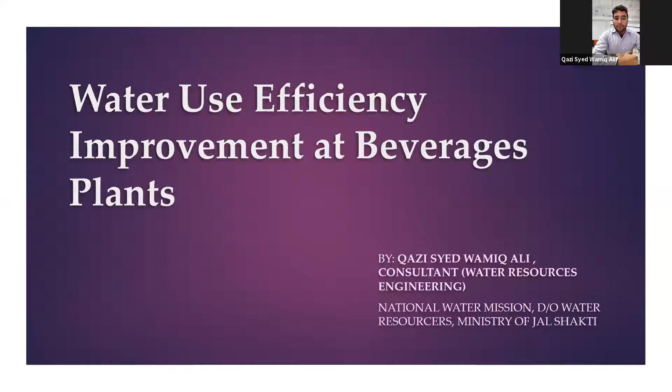This project is for about 1 year. The basic objective of this study is to reduce the water usage ratio, and also monitor and assess the UF-RO filtration process that has been used in tertiary treatment in the beverage sector after the ETP in different beverage plants, to understand the actual efficiency of the ultrafiltration reverse osmosis process. As a pilot project, I have taken the first plant, the Ameenpur plant in Hyderabad.

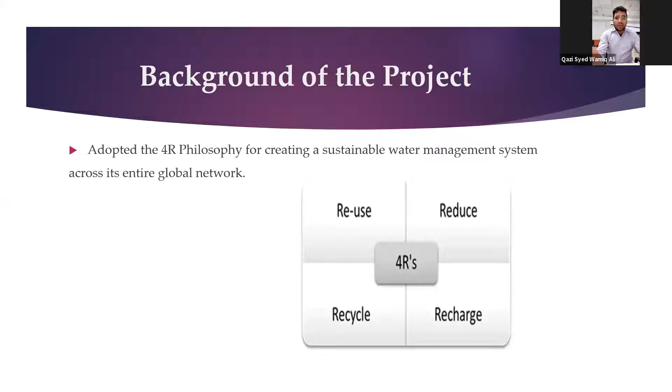This is basically the normal water treatment process for this beverage industry, where the major intake is from the Manjira River, from where they collect the water. This is the typical water treatment process, with tube settlers and pressurized sand filters, and activated carbon used for removing pesticide or odor. Then it goes to different units like a dealkalizer, degasser tower, and activated carbon filter, where if the chlorine is free, it can be used further for UV.

This water is used for two processes, taking the groundwater or the pond water for treatment. It also goes to the units, and also for the bottling process, because the beverage industry has its own bottling process unit. So when it goes for filling the bottles, this final product has been used.

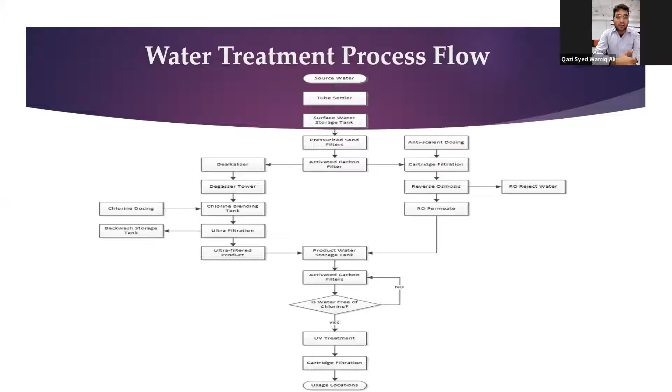So this is the normal water effluent treatment plant process of that particular beverage industry, where they have normally collection sump, oil grease separation, and equalization tank.

What we did when we started this study, we did it stepwise. First we started monitoring the WTP, then we inspected the ETP, because there were two issues coming up: high hardness at the end of the tertiary treatment in UFRO, and also floc carryover. There is an issue of floc carryover, hardness, and also failure of the UFRO, that is not giving us the opportunity to reuse excess amount of water.

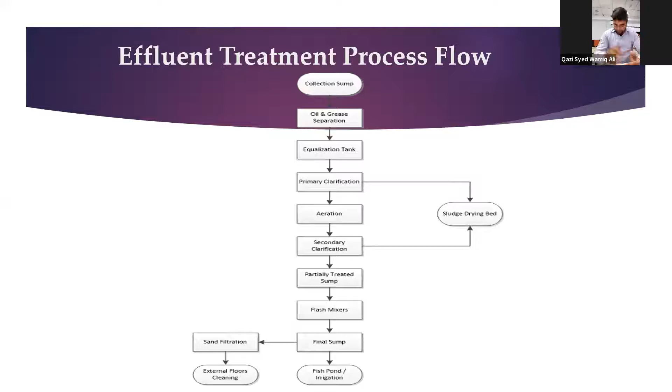Basically, our aim is to reduce water usage ratio. What is water usage ratio? It is the ratio of the water intake by the industry and the volume of beverage manufactured. So as much as the water usage ratio is low for any industry, it means they're intaking less raw water. For example, if 1.6 is the water use ratio, it means 1.6 liters of water has been used for producing 1 liter of beverage. So as much as the WUR is low, it will be beneficial to us.

So in that project, our aim is water use ratio reduction, and we got the water use ratio reduction from 1.42 to 1.36. Though it's not a very huge gap, it gives us savings of water in KLDs, in thousands.

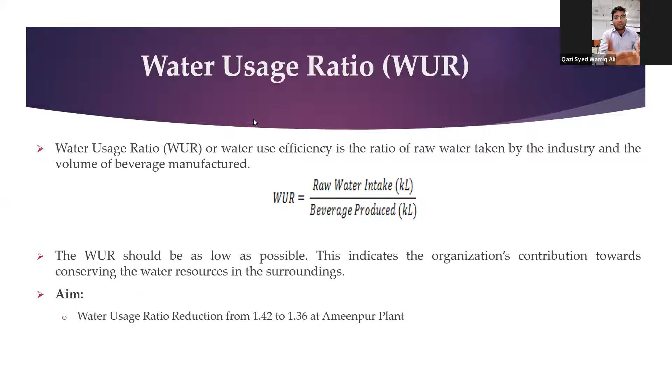Before doing the inspection, we recommended that as per CPCB norms, high hardness water from that particular industry should not be sent to the CETP. So the CPCB has recommended us to go for the ZLD phase.

For the ZLD phase, we recommended the scheme that you can see on the screen: a second stage UFRO, using UFRO, UV, ozonator, and CIP.

CIP is the cleaning process, where mostly they were using raw water. We recommended that instead of raw water, you can go for treated water. That saves around 30,000 rupees per day for that particular consumption.

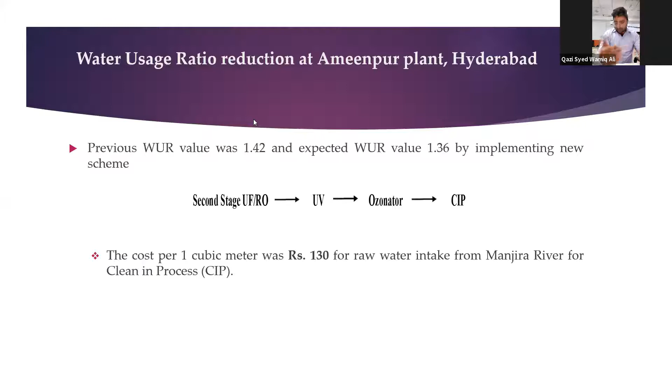So we followed a basic methodology. First, we did the benefit flow analysis to rectify what issues were coming up in the ETP, and if we install a new UFRO. We did the water balance and TDS balancing. Also, we did the proposed water balance to understand whether additional water has been available or required for making it available to the new UFRO system, the second stage RO treatment system.

Instead of using RGB, we can go for a PET line. That gives us a reduction of TDS of around 15% and makes the UFRO run up to 80% efficiency. Next slide.

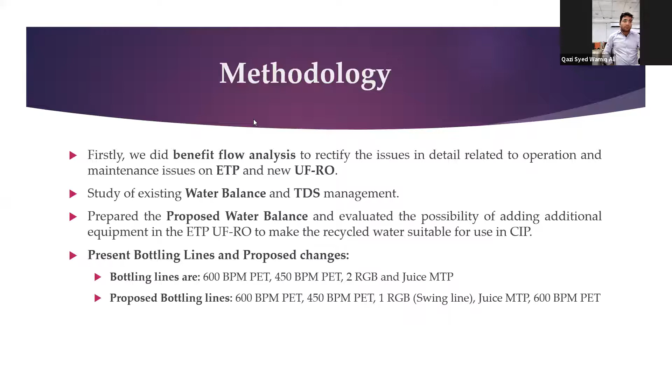Then we moved further for analysis of the water treatment process, where we found that since operation, the dealkalizer unit has issues with effluent TDS, because the TDS generated is very high.

So we suggested using the chemical coagulation unit at maximum output. For that, to bring the maximum output, we used a standby 3 micron filter and UV to make the coagulation system run at maximum output, supplying water coming from the PET line directly, to reduce the burden on the dealkalizer unit.

And also reduce the chemical consumption. Next, we also found there is a possibility of carryover of floc into the sand and carbon filters, damaging the filters.

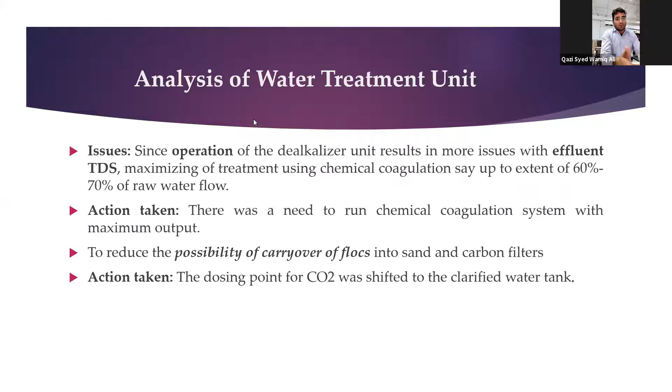So we have suggested that, and we have implemented. We did the repair work for the air diffusers for the equalization tank. We have installed the new diffuser grid system in order to maintain the DO level of around 2 mg per liter or more. Second, we also seen that the aeration tank, also there is an issue.

There is black water due to dead bacteria present in bulk, and spent carbon is also coming up. We also found that in the aeration tank also, improper and inadequate air distribution was there.

So we have recommended new air blowers, and we have placed new air diffusers with capacity of around 1,000 meter cube aerated water that can be supplied, and 50 more air diffusers have been used with oxygen usage of around 1.5 kg of BOD, and that has been maintained. The DO of around 4 to 5 ppm. So this intervention has been done in the ETP.

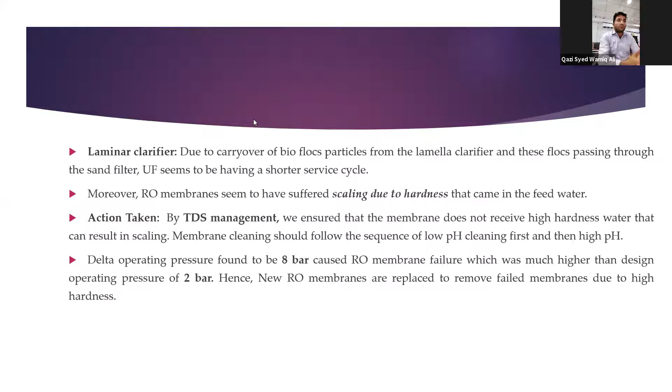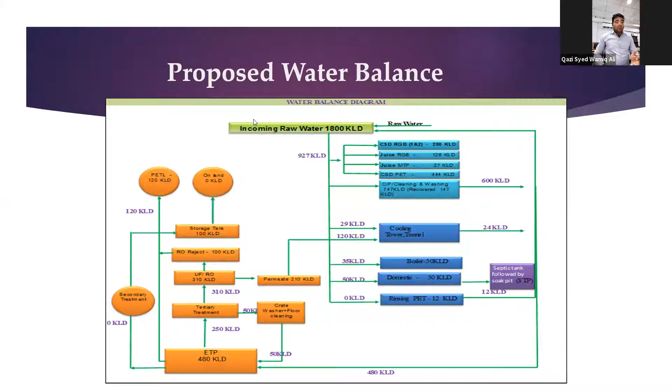But we found that in the new water balancing, around 120 KLD water should go to the CETP, that is in Hyderabad. Next slide.

So we also did the TDS balancing, and we found certain places where the TDS contribution - this is the worst case scenario TDS balancing we did, where we found softener regeneration is contributing around 12,000, dealkaliser regeneration is around 8,000, and UFRO rejects around 5,000.

So what we did - after the TDS balancing, all these points, for example softener regeneration, bottle washer, and DC regeneration - we have segregated these lines. Next slide.

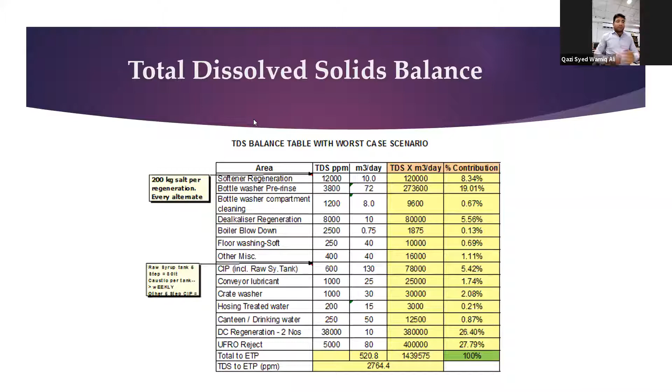So we did the segregation so that all the hardness will go directly to CETP instead of going into the ETP, until and unless the rectification has been done.

So we have also segregated the high and low TDS lines, and added additional tanks near the decausticiser and dealkaliser unit to achieve the segregation, and to stop the high hardness water from entering the ETP until rectification has been done in UFRO, and the second stage UFRO has been installed. So this has prevented the UFRO membrane failure and has made the UFRO run up to 70 to 80% efficiency.

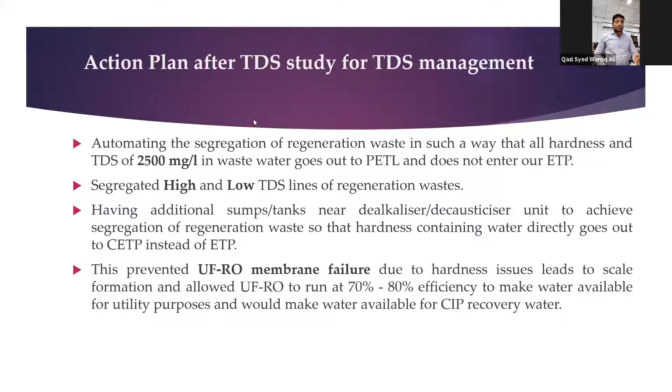We also did a small study on water use reduction opportunities at the Ameenpur plant. Wherever there was a raw water intake, we used UFRO treated water instead, for example in conveyor lubrication. The lines marked in red were pending at that time and are still under construction, so those lines still have to be provided. There are a few places where we've been able to use treated UFRO water instead of raw water.

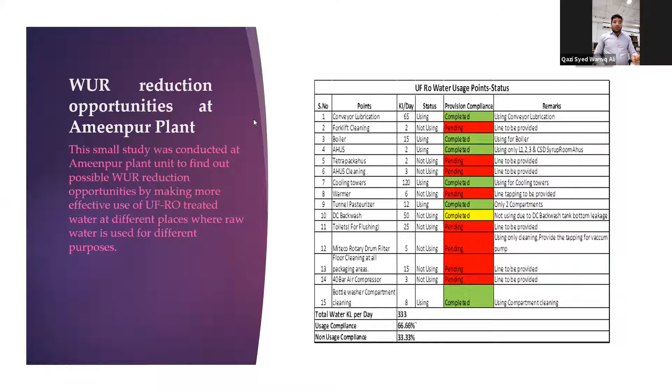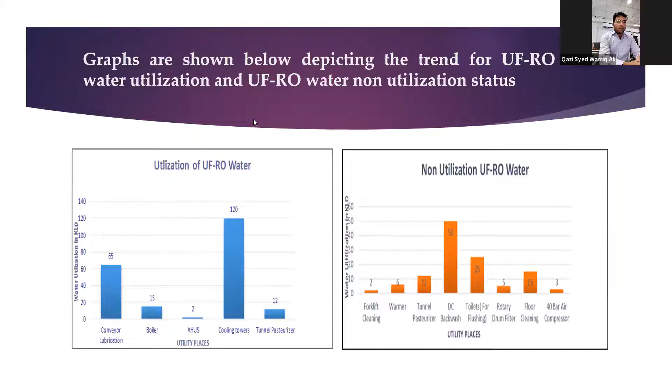When it comes to compliance, around 66.66% UFRO treated water compliance is going on, with non-usage compliance around 33%. This means the amount of water recovered in a day is around 333 KLD. We found that for the lines still using raw water instead of treated water, if they reuse UFRO water, it would give us a better water use ratio and could increase efficiency by around 60 to 90%.

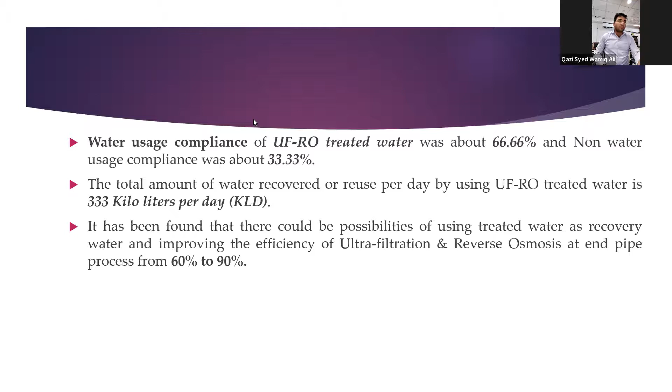This is the plan we recommended for a new ETP UFRO unit. Before that, we also saw there is an additional requirement because, as per State Pollution Control Board guidelines, 120 to 130 KLD goes to ETP, and we still want to make up for 172 KLD. Based on all these recommendations, we were able to achieve a small improvement in water use efficiency.

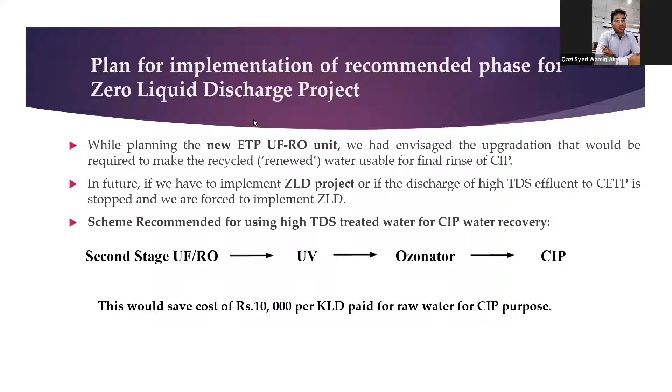This is the scheme we recommended at the end. If in future the plant goes for the ZLD phase, this is the scheme the plant has to follow.

Thank you, Qazi, for this presentation and for sharing the findings of this project. We have a few questions that I'll take up now from people watching this presentation.

For this particular beverage industry, water is one of the major components of their product. As far as I know, at that time high TDS water was going to the CETP, the common effluent treatment plant. So the State Pollution Control Board issued guidelines to that beverage industry that they should go for the ZLD phase if they did not control the high TDS in the water. So they weren't motivated by choice—they were forced to implement the ZLD phase at that time.

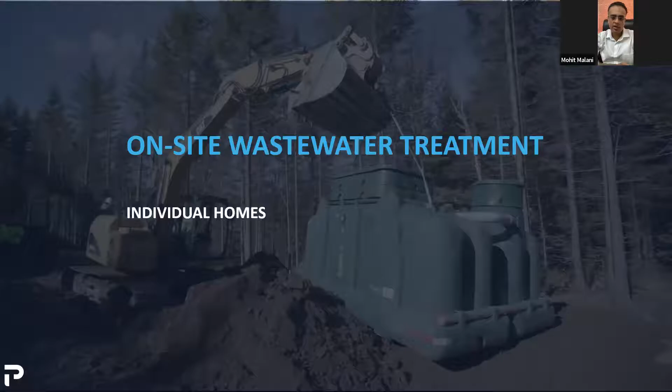So of course we have on-site wastewater treatment for individual homes. Next, the Ecoflo, where we have sold more than 450,000 systems worldwide, and it is our leading product for Premier Tech worldwide.

Then, of course, we have our on-site wastewater treatment, which is our big commercial community CCI projects for hotels, hospitals, and everything, where we have done more than 2,000 projects around the world, including selling technologies for big municipal wastewater treatment plants.

We are already talking about the SBR in India, and we've got quite a few projects, and we can really design systems up to 200,000 meter cube per day, or 200 MLD.

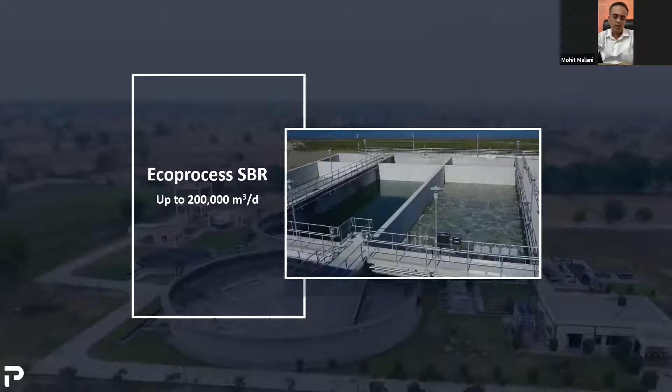And of course, client solutions is also something which is very important to us.

This is our expertise. We do design, after-sales support, and maintenance services.

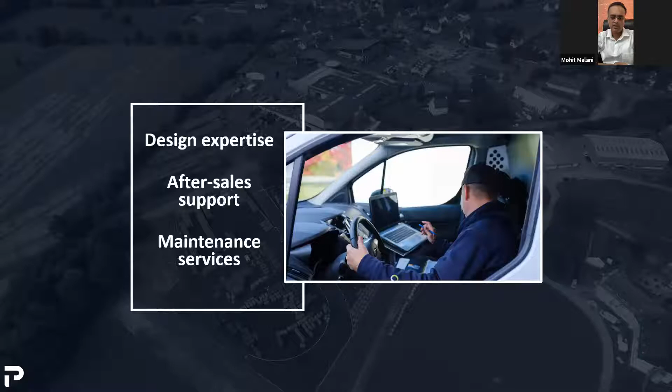This is basically trained by experts and everything. So just to give you a background of our progress in India.

We've been active in India since 2006, where we have been promoting SBR, and now recently we've launched our own MBR, where we manufacture the media ourselves, our own membranes, and now we've also launched tertiary treatment systems with disk filtration.

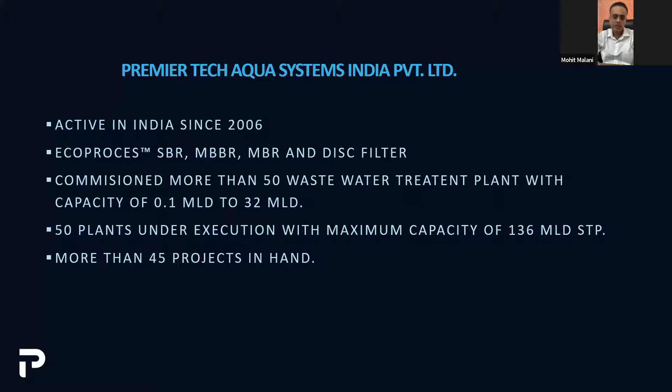We have commissioned more than 50 wastewater treatment plants with EPC players, ranging from a capacity of 100 KLD to around 32 MLD, and we would be commissioning our biggest STP hopefully by March, which would be of 136 MLD capacity. And we have more than 45 projects in hand which we need to execute in the coming years.

So I now hand it over to Varun, who will give you the background on leachate treatment and how we can treat leachate with our SBR systems. Thanks.

Thank you, Mohit, for the introduction, and thank you, Wastewater team, for giving us the chance.

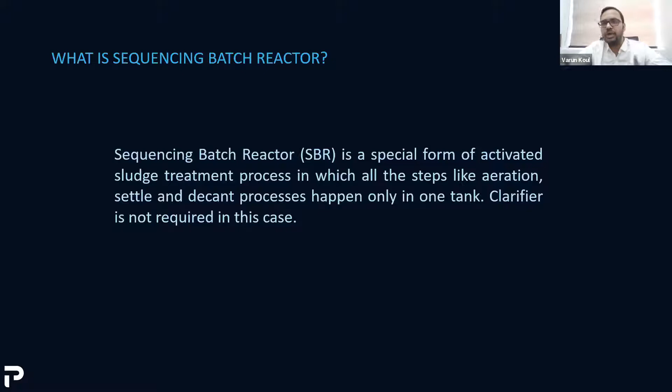So we are talking about leachate treatment using SBR technology, sequencing batch reactor. Before that, just giving you a brief about what SBR is. SBR is a sequencing batch reactor, a special type of activated sludge process where the entire treatment happens in a single tank. The anoxic zone, aeration zone happens in one tank, and the clarification also happens there only. We don't need a clarifier, and we can avoid an equalization tank also.

Giving you a comparison between SBR and a conventional system: in a conventional system, we need an equalization tank, some pre-treatment or chemical separation, anoxic tank, aeration tank, clarifier, and the sludge system. Whereas in SBR, we just need an SBR system and a sludge dewatering system. So our anoxic zone, aeration zone, and clarifier all get combined into a single tank. That's how we save space, and we can get better quality of water in a smaller area.

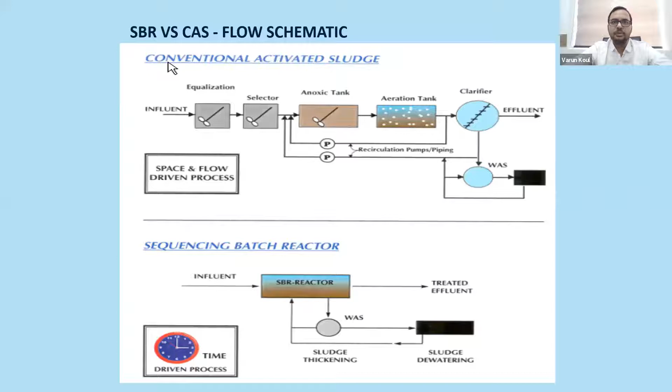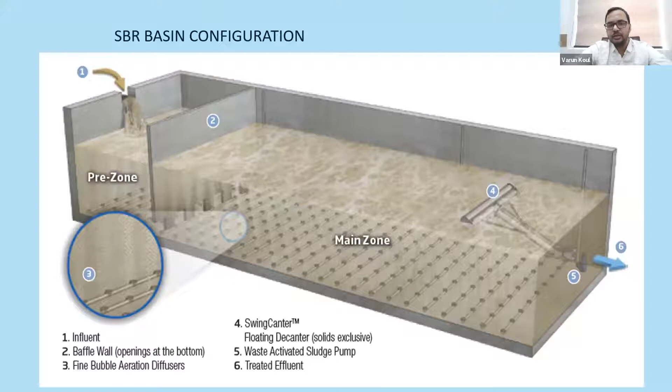Giving you more details on the SBR tank: the SBR zone is divided into two tanks, a pre-zone and the main zone, divided by a baffle plate, so the water moves from the underflow to the main zone from the pre-zone. We have diffusers in the entire tank, which are fine bubble diffusers used to mix oxygen into the water to maintain DO levels. And then at the end we have a decanter. In this picture we are showing our proprietary product, SwingCanter, which is a floating decanter. This works without any power consumption.

So what are the processes which happen in an SBR tank? First is filling of the water into the tank, and there are two steps to it. Half of the tank, a partial fill, we fill without mixing it with air, so a kind of anoxic zone or anoxic environment is created. For the rest, the other half, we switch on our blower and the mixing happens to create an aerobic zone. The aerobic process continues, and once the tank is filled, the mixing happens and aerobic bacteria do their work breaking down the BOD and other parameters.

Post that, we go to a settling zone where the same tank acts as a clarifier, the sludge settles down, and the clean water can be taken away from the top. That's the next step of the decanting zone, where we take the clean water with the help of a decanter, and the settled sludge at the bottom can be recirculated back and taken out for further sludge treatment.

Coming to leachate, what exactly is leachate? It's a chemical waste which forms in landfills. Once we keep dumping our garbage on the landfill, water passes through the landfill and gets mixed with various types of impurities, goes into the earth with impurities and chemicals, and starts building up dirty water on the earth's surface. That's what leachate is.

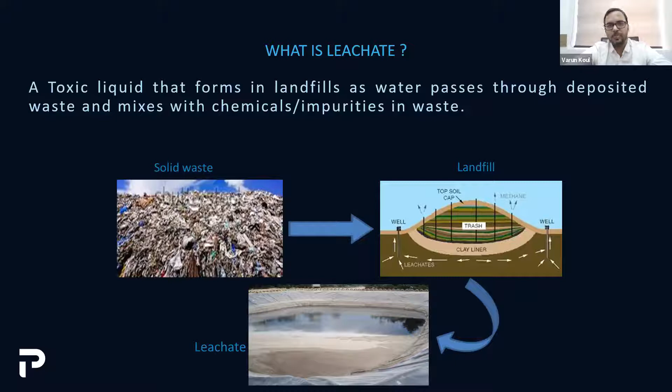So depending upon the age of the leachate, we divide the parameters on a thumb rule basis. Let's say if the landfill is young, less than 5 years old, or the landfill is between 5 to 10 years, or more than 10 years. Based on the age of the landfill, we divide it.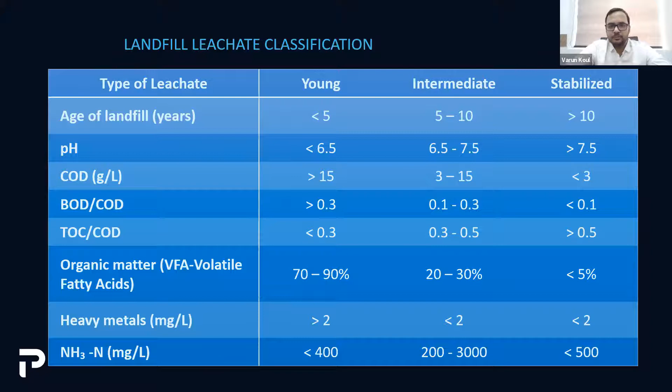And how SBR helps in leachate treatment is we reduce BOD, COD, ammonia, phosphorus, all these parameters we can reduce. It helps us tolerate peak flow and shock load of BOD, variations of the BOD, whatever happens with the age of leachate. The primary clarification, biological treatment, secondary clarification, all can be achieved in a single vessel, as I told you earlier.

And the best part is operation flexibility and control of effluent discharge. So in case we are not getting the peak load, we are not getting the design load, still we can operate the SBR system. Next, please.

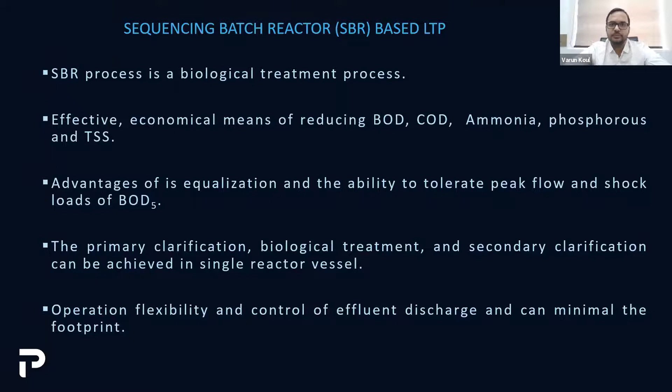Going into further detail of what reactions happen in an SBR tank. First, talking about BOD removal. Let's say the COHNS, which is the organic waste in the water - carbon, oxygen, hydrogen, nitrogen, sulfur, all put together, termed as organic waste - gets mixed with oxygen, nutrients, and bacteria present in the water to generate carbon dioxide, ammonia, and new cell tissues.

Then the endogenous respiration happens of the new cell tissues which are formed in the form of C5H7NO2, get mixed with oxygen, which we are supplying through diffuser and the blower, to generate CO2, water, and NH3. Next, please.

So we broke down BOD into nitrogen compounds, and then we do nitrification and denitrification to break down the nitrogen further. Ammonia gets mixed with oxygen in presence of nitrosomonas bacteria to generate nitrite and hydrogen and water. The next step is nitrite combined with oxygen in the presence of nitrobacter to generate nitrate. So we are further converting our BOD to nitrogen compounds and then nitrogen compound to nitrate.

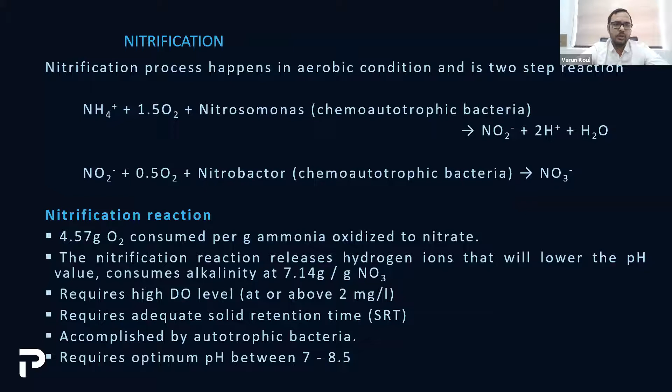In this process, we are using BOD and oxidizing ammonia. The values - 4.57 gram of oxygen is consumed per gram of ammonia oxidized to nitrate. Nitrification also lowers the pH by consuming alkalinity at the rate of 7.14 gram per gram of NO3. It requires DO of 2 mg per liter. Next, please.

Then going to, next please.

So going to denitrification now. Nitrate, which is generated, gets combined with BOD from the feed to generate nitrogen gas and CO2 as gas, and water. This is an anoxic zone where this reaction happens, kind of in the filling time of the SBR system. Theoretically, roughly 2.86 gram of BOD is needed for complete removal of 1 gram of NO3-N. Denitrification further produces alkalinity at the rate of 3.6 gram per gram of NO3-N reduction.

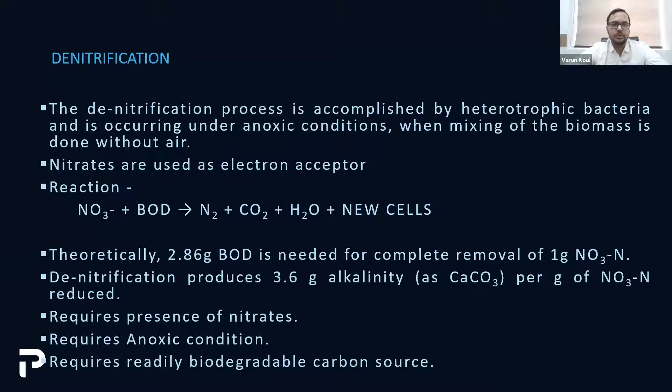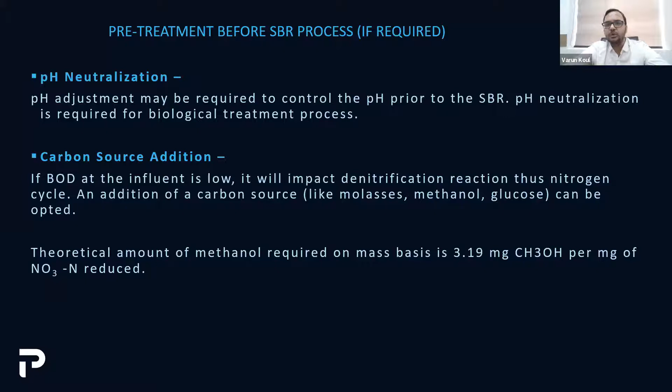And then in case we require, with all this reaction, if there are some other challenges in the water, we need to do some pre-treatment. In terms of pH neutralization, we prefer to have pH in a range of 7 to 8. If that is not achieved naturally, we add some external chemicals to maintain the pH values. We may have to add a carbon source in case the BOD levels are not matching, to maintain the BOD, phosphorus and nitrogen ratio. So we add carbon sources like molasses, methanol, glucose. Next, please.

Nutrients - we might need nutrients for healthy bacteria, because if the bacteria is dying or dead, they come to the surface in the form of foam. So we need healthy bacteria, and we add nutrients to maintain the health of bacteria if we are not getting enough nutrients in the feed water. If there are toxic metals in the waste, we have to remove them via the process of coagulation and flocculation. We can use alum sulfate and coagulant polymer to achieve this, to remove the toxic metals. Next, please.

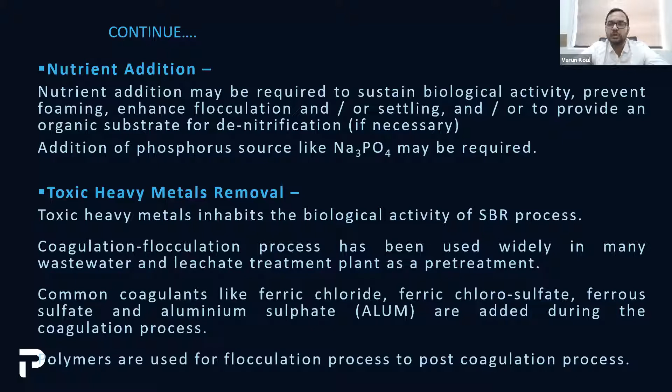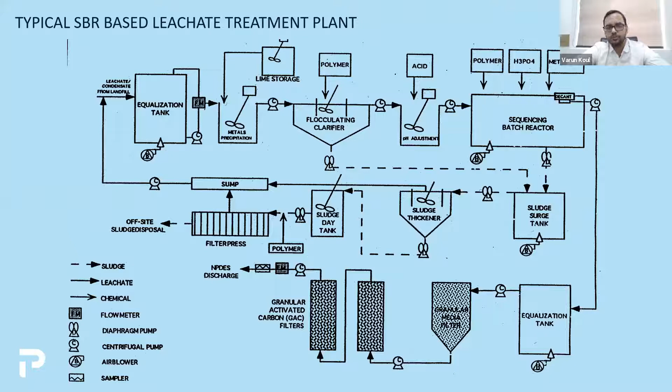So running you through a typical process flow drawing of how leachate treatment looks. We have an equalization tank and then a metals precipitation in case there are heavy metals in the water, where we need lime dosing and polymer dosing for coagulation and flocculation. After this, we have a pH adjustment system, and then it goes to the SBR. If we do not need these pre-treatments, we can avoid the equalization tank also. Then in the SBR, the cycles happen: filling, reaction, settling, and decanting. From there, we get the treated water going into the treated water tank, and then tertiary treatment, let it be a carbon filter, multimedia filter, or anything depending upon the requirement. Sludge can be treated further in a separate line through a filter press or centrifuge, based on the requirement.

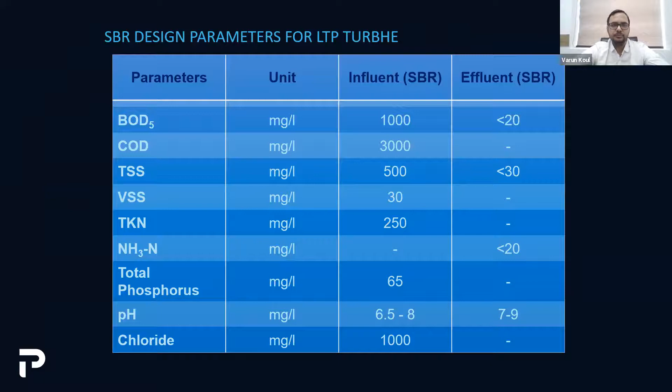A bit of design basis: the HRT we maintained here was roughly 5 days, with an SRT of 25 days, MLSS of 3000, and an F/M ratio of 0.12.

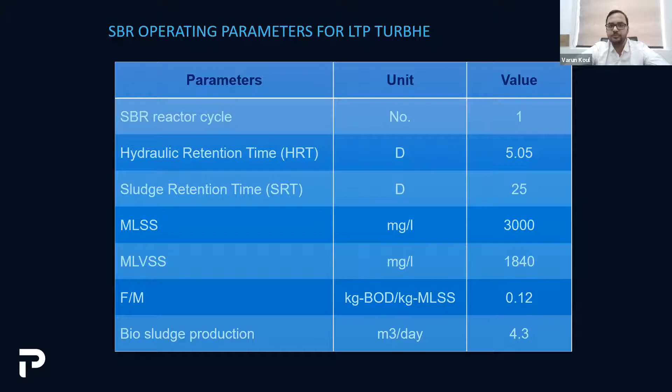A few more pictures showing our SwingCanter.

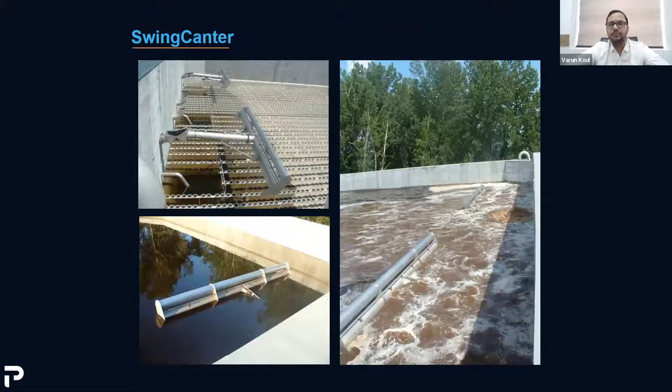I would like to conclude this by quoting that we do not inherit the earth from our ancestors, but we borrow it from our children. So we'll keep this in mind, and that's why we should preserve it, so that our loved ones are proud of our legacy.

Thank you, Kailash. Thank you, Smart Water and Waste World. Actually, Waste World reminds me that a whole lot of waste is getting problematic, and I must congratulate Kailash and your team for doing such a wonderful job organizing events like this Industrial Water and Effluent Treatment webinar series. Thank you very much. I have pleasure in talking to you on membrane bioreactor. As I could see, we have more than 300 participants, so it makes me very responsible to talk something very sensible with respect to this technology.

Just a little idea about what we do. My company, Aktion Consultancy, focuses on training and performance management, design, engineering, consultation, condition assessment, retrofit and modification of existing projects, pilot studies, innovations, O&M advisory services, chemistry integration with existing projects, and project management consultancy for new projects. In short, we focus on knowledge management in water and wastewater.

And what's this 'Waughter'? It's a new word coined by my team, my colleagues. We believe that all recycled water is the daughter of water, and it should be named Waughter, pure, pristine, and future. Because in the future, probably we don't have water, we just have Waughter, the way we pronounce it.

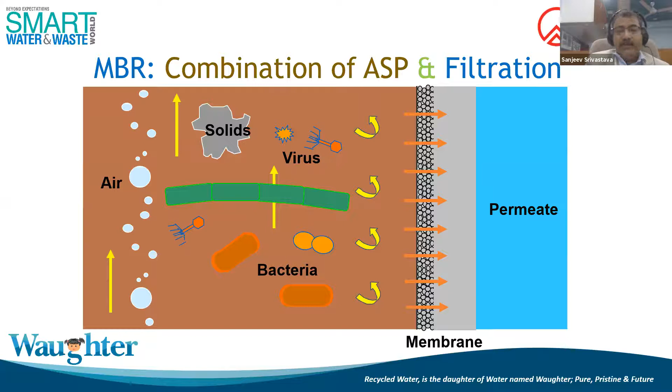And wherever the next process is filtration, your job is to treat the clean water and take it out from the reactor. My focus more would be today on that area.

While these things are coming in, we're all familiar with the activated sludge process. Lots of schemes: influent coming in, then you put some screens, create some anoxic conditions, maybe anaerobic conditions too if phosphate removal is the goal. You go to the activated sludge reactor. Till now, you manage everything. And when it comes to final sedimentation, you start worrying a little bit.

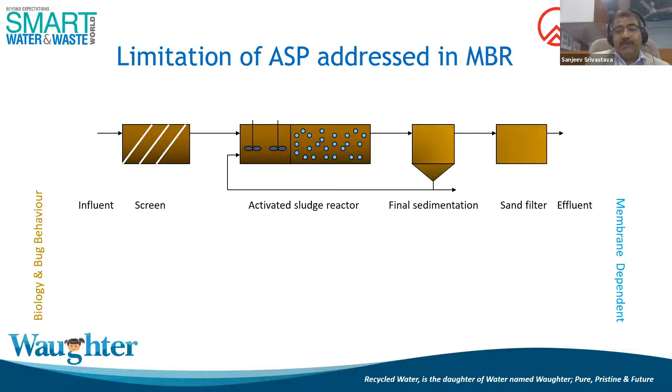In conventional activated sludge process, there's an issue with the activated sludge reactor too, but a biologist or good wastewater treatment expert has got several ways to solve those issues. But in the majority of cases, the final sedimentation and filtration, or tertiary treatment, becomes a headache, especially when we are looking towards recycling and reuse.

So here comes the MBR, with almost the same kind of structure. But what's different is you don't see the sand filter part or the settler part now. So how can you avoid those two things? You can avoid them with a very simple action called sucking the permeate from the existing aeration system.

So you're using the energy of pumps on the suction side. The barrier is the way we put a screen or a basket strainer at the inlet of the pump to remove bigger solid particles. Now you have to have membranes, which are very, very fine, so that they do not allow any biomass to escape the aeration tank.

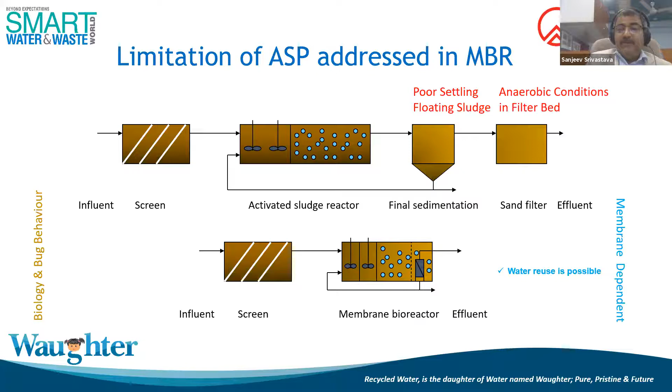That's a very simple process, and definitely it has got a lot of advantages. Some advantages we talk about. First, what are the limitations of activated sludge?

Most of my colleagues would agree with me, and most people who have worked in water and wastewater management have faced the problems of poor settling and floating sludge. Both these problems are interrelated. Poor settling means sometimes the sludge consistency is not good, so the treated water quality is good but the sludge compaction is not taking place. Floating sludge means the treated water quality also becomes bad and everything goes to the filter.

Now look at the filter, what it's doing. The filter is trying to filter everything because it's filled with sand, so it will filter everything. But the biomass which goes to the filter bed now has to remain there in anaerobic conditions. It starts creating problems, and one of the biggest problems it creates is odor.

If the objective is tertiary treatment, maybe a simple objective like toilet flushing or gardening, your objective is not met, because once an odor, which is a gas, is found, after that you will put UF, RO, or whatever you want, and nothing will happen because gases will pass everything. So one of the big responsibilities today in wastewater treatment, in sewage management, is how do we develop a process which is neat and clean and does not produce any odor? Because if odor is there, you are not willing to recycle the water even for washing your car.

So this is where the MBR became very, very popular in India and the whole world. I actually like this technology because, if handled well, it can be one of the very good technologies with respect to the recycling objective. But there are a lot of advantages we get.

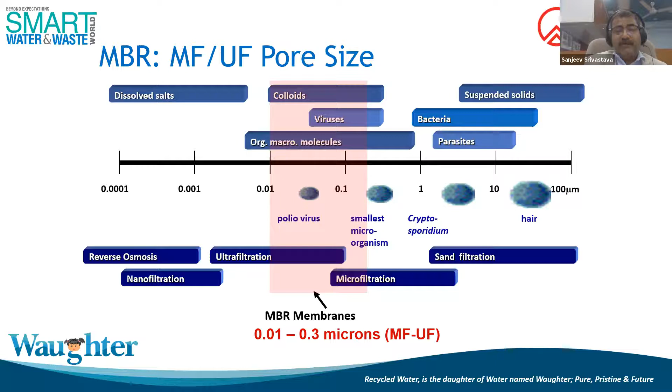In MBR you can have pore size, MF and UF. The pore size has relevance with respect to 0.01 micron to 0.3 micron. Any MF or UF material can be used in a membrane bioreactor. Different manufacturers use different pore sizes. As it appears natural, the finer the pore, the better the treated water quality. But the TMP, transmembrane pressure differential, becomes higher when the membrane is fine. So there is a trade-off between pore size and transmembrane pressure differential.

In 15 minutes I cannot cover everything in MBR, but I'll try to cover the relevant parts. In MBR working conditions, we have something important called filtration backwash. We have the air separation vessel, pre-filters and basket filters, filtrate reservoir, which is a very important unit. We need to know where the filtrate reservoir should be, how it should be designed, and lots of manifold valves, because lots of flow and reversal flow has to happen.

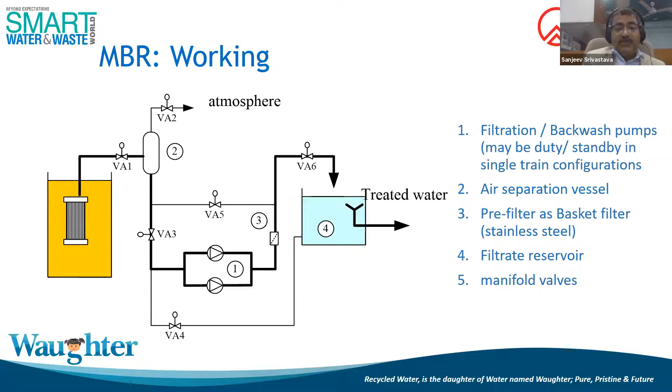Now, there are two ways you can put the membranes: submerged or pressurized. I'll be slightly faster on some slides. If you put the membrane tanks in the same kind of tank, it is called a membranes-in-biological-tank design, so no recirculation is needed, neither a supplementary tank. But believe me, this is not an advantage, it is a disadvantage. So don't say that nothing is needed, this is the best.

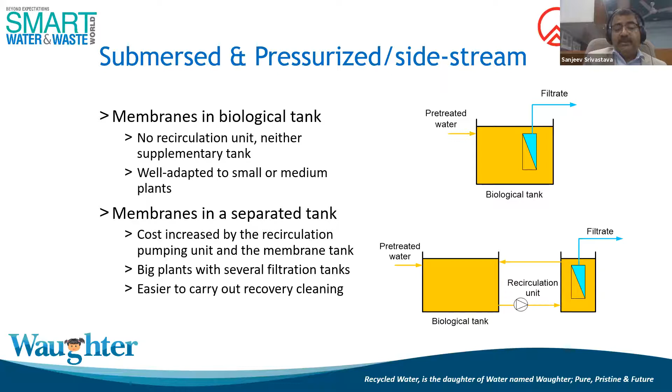No, when you learn a little bit more, you will feel that it could be a disadvantage. Membranes in a separate tank is much more advantageous, but you require recirculation units. It is required for big plants, so there are several filtration tanks, and it is easy to carry out the recovery cleaning of the membranes.

Because your membrane tank is separated from the biology tank, there's one more modern way to do this: you take a reactor, and all your biomass via feed pumps is taken to the external modules. If you look at the right-hand side pictures, it looks very neat and clean, no mess, everything covered, beautiful plants.

But it's got its own issues, it's got its limitations. Everything good is like, for example, automatic cars are good, but automatic cars have got their own limitations. If you don't know how to unlock yourself, you remain locked in the car. So more training, more precision is required in handling something more sophisticated.

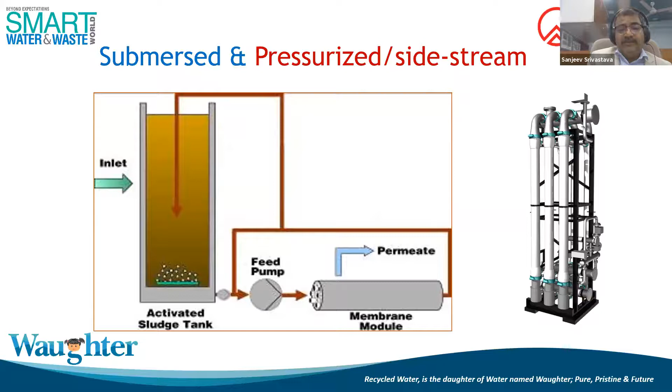When we look at the effluent parameters, conventional parameters, I'm not going to read BOD, COD. If you look at the MBR, you get very good quality, and believe me, very good quality means very good quality. So what you see here is something in the aeration tank, something in the sludge, and something as a liquid clear permeate product. So you have input, you have the aeration tank, and you have a very clean, crystal clear product.

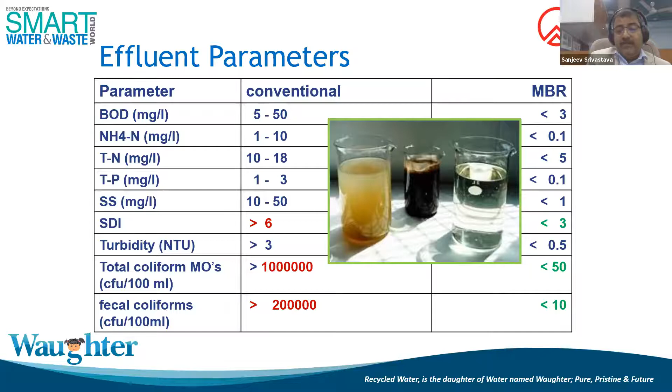The real advantages of MBR come in three parameters: SDI, coliform, and fecal coliform. Because the other parameters are more biology dependent, not MBR dependent. But these three parameters, SDI, coliforms, and fecal coliforms, count to be very low.

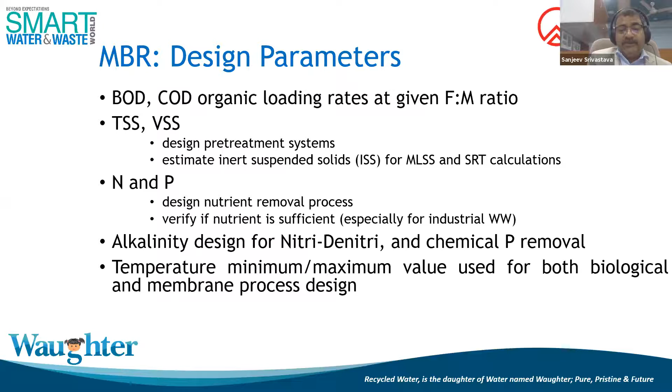Yes, the filtration part is totally different. In MBR treatment, grit removal is very important, because sand cannot go to sophisticated equipment. Earlier, if you had a small wastewater treatment plant, you could say, okay, let the grit go to the aeration tank, it will go to the sludge. But in MBR, don't take that risk, because you are pushing water from the aeration tank to the MBR tank, and the grit and sand cannot go to the membrane. It's a very fragile material.

Grease is absolutely not going into the system. So some systems will require some kind of primary clarification. Please do that. But the disadvantage will be that primary clarification will remove some of the BOD and some of the TSS also, which may be healthy and good for your plant. So I'll come to that when I talk about the case study.

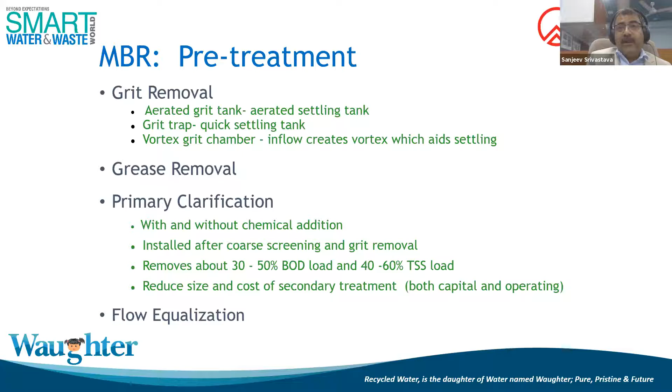And flow equalization is important in MBR. Very, very important word is flow equalization. If you are not doing the equalization of the flow, you will have problems. What kind of problems will come in the future slides.

You can use any kind of membranes, but this is a technical word. The reality is, tubular ceramic membranes are very rare. I have not seen many plants, but there could be some very good applications with ceramics. I am developing right now some very special things with ceramic membranes in MBR modules. A spiral wound membrane also I have not come across much. In fact, I have not come across any spiral wound membrane used in MBR application.

But tubular membranes, flat sheet membranes, and hollow fiber membranes are pretty common, and submerged membranes therefore are very common. But there are enough side stream or pressurized applications also in the world. In fact, one of the very large installations of anaerobic MBR is done with side stream in pressurized way. Anaerobic, not aerobic. So one of the largest installations in the world for COD removal in anaerobic is done with pressurized membranes.

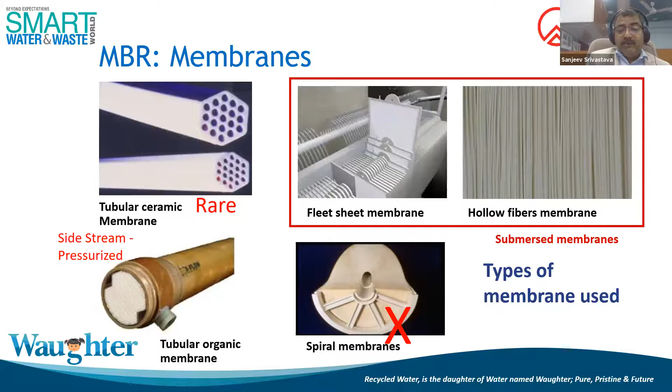And you start telling which is good, which is bad. In my 30 years of experience, I've said everything is good because it is produced by one of the world's best companies, so there's no comparison on various things. But we are used to comparing cars like Alto versus Hyundai versus Japanese, so we start comparing the same way in technical matters. All these products have been produced by world's renowned companies, and therefore I have respect for all the products, and they are beautiful products. Same is the case with the flat sheet.

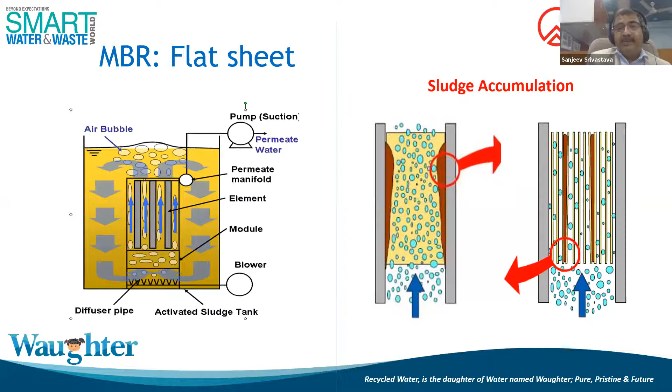There is a lot of discussion about whether a flat sheet is good or a spiral wound is good. Look at the flat sheet membranes, they are beautiful membranes and one can use them. Only sludge accumulation happens in the flat sheets. If that's because of poor engineering design, I'll say there's no problem in the product design itself. If the engineering design is not done well, you will start saying, no, the flat sheet membranes are not good. But otherwise, I've seen many installations in Japan, all flat sheet membranes, and they are beautiful products.

This is therefore a slide which everybody wants, so I have to give it. This is not a comparison or recommendation, but it's an experience. With respect to parameters like air consumption, high MLSS, compacity, design fluxes, robustness - I've got no reason to say that hollow fiber membranes are not robust, but if it's a flat sheet, it's slightly advantageous when robustness is a parameter. This is the experience I'm talking about here.

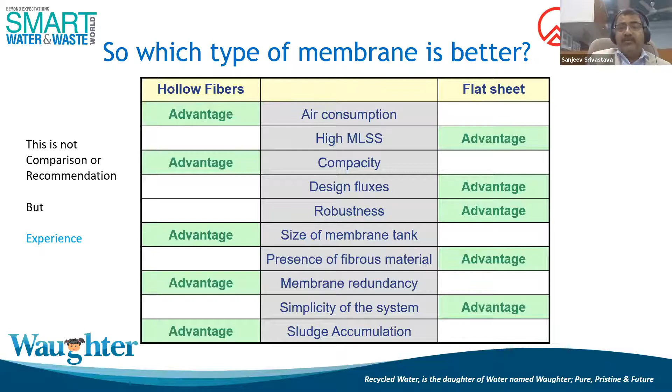So on and so forth: membrane redundancy, simplicity of the system, and sludge accumulation. You can say sludge accumulation can be slightly more in flat sheet, but I have not seen much sludge accumulation in hollow fibers. This is what experience is. Again, I'll repeat, no comparison, no recommendation. These are produced by the world's beautiful companies.

This is where the next thing comes, and this is where the entire attention should come during my presentation. Unlike activated sludge process, which was a continuous process, suddenly process engineers must realize you are now dealing with two processes. One is called continuous process, which is activated sludge, and the second is called membrane filtration, which is a batch process. And the batch is so small - 9 minutes filtration, 1 minute backwash, 9 minutes filtration, 1 minute backwash. So in 1 hour, that's 6 cycles. In a day, 150 cycles. Now, can you appoint operators to do 150 cycles?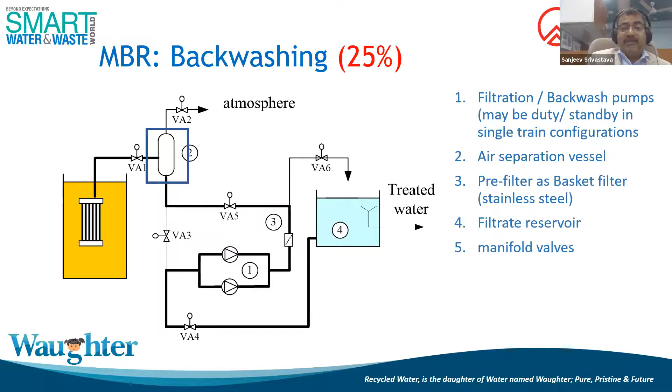The answer is no. So the backwash efficiency - ignorance of a PSF backwash, okay, there's no problem. But ignorance of backwashing of an MBR membrane means the sky will fall. So 25% of the problems we see in MBR systems worldwide are related to backwashing issues. Flux not designed properly, or flux designed properly, but 'sir, what to do, the pump we got was 20% less capacity, so we thought it's okay, we will increase the time of backwash from 1 minute to 1.2 minutes' - but the pump becomes slightly smaller. These kinds of cutting corners can create problems, and that's where my experience comes in. MBR backwashing leads to 25% of the problems.

Almost 20% of the cases, the problem is in deaeration and degasification. Many people ask me why deaeration and degasification is required in this particular system. But if you understand the third angle of biology, physics, and chemistry, we are producing carbon dioxide as a gas. And in equipment where we are doing suction, Henry's law comes into the picture, and gases preferably will go into the fiber. If the gases go into the fiber, they create something called gas lock or air lock. They must be degassed, or deaeration must take place. If that's not happening, the MBR system becomes problematic. In engineering design, some people make mistakes - maybe in vessel design, sometimes people don't do deaeration. They do something called auto air removal at the start of the filtration cycle, but that's not good enough. For a larger installation, deaeration and degassing phases are a must, and proper engineering is required for that.

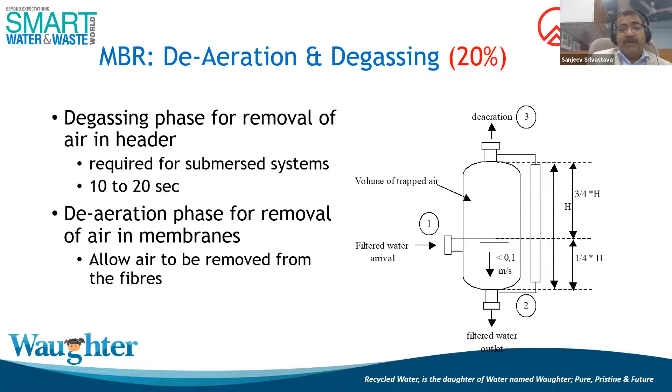And very rarely - that's why I say only 5% of problems are accounted for by something called cleaning strategy. Your membrane cleaning strategy depends upon two things: one, manufacturer's guidelines; second, your own process waste. So you cannot generalize - in my previous plant I had this kind of cleaning strategy, so in the next plant we'll have this cleaning strategy - because those two plants could be totally different. It depends upon the membranes. It depends upon the plants.

Chemical use are very simple: chlorine, acids, and alkali. You don't have mega, very difficult chemicals. Sometimes a little bit of formulation addition like dispersant helps.

Frequency could vary. For municipal wastewater treatment plants, if you do cleaning once a week, it's okay. For an industrial wastewater treatment plant, I've seen you may have to do cleaning once a day. It all depends upon the kind of waste.

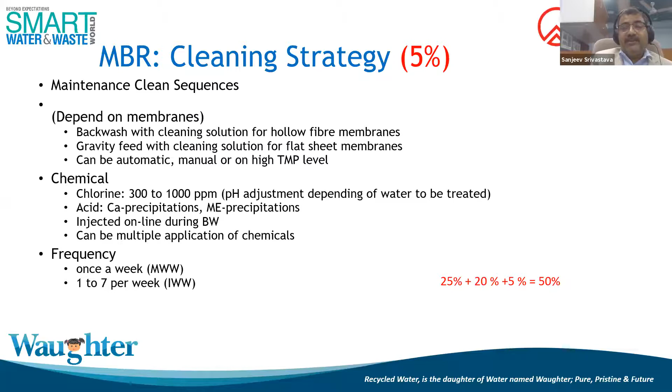So all your problems are solved - 25% plus 20% plus 5% is about 50%. So if I ask you, where is the next 50% of problems in MBR? Your answer is not here actually. This is a slide which has come in between.

Foam and scum, which you see in MBRs, is not a problem. If you ask a biologist or if you ask me, I'll say foam and scum are not a problem - you get prepared for it. Because if you want to work with higher MLSS, meaning high quantity of bugs per cubic foot or per meter cube of volume - I'll use a bad term - then you be prepared to manage that much shit. Because if the bugs are there, they will eat. That's their job. They are prolific eaters, so foam will be there, scum will be there.

What is required is that you plan for foam. And what is the best way to plan for foam? We all have learned in engineering 300 mm of freeboard - it doesn't work here in MBR designs. When you are talking about 1 meter of freeboard in the aeration tank, that's the only way you can manage the foam. Spraying something on the foam is not a good idea.

Same is the case with scum. Put the floating skimmer to remove the scum periodically - there's no other way, or you put something called a scum guard in the anoxic zone. These are the characteristics of these things.

Even we are simple people. Even at our home, if we put some pulses, dal with water, next day what we get in the pot? Dal becomes fermented, but you also get foam. So you can't avoid foam when there is bioactivity. So suppressing that foam with chemical is not a good idea. Foam and scum is actually not the issue - it is something which will happen, and a good MBR designer will plan for it.

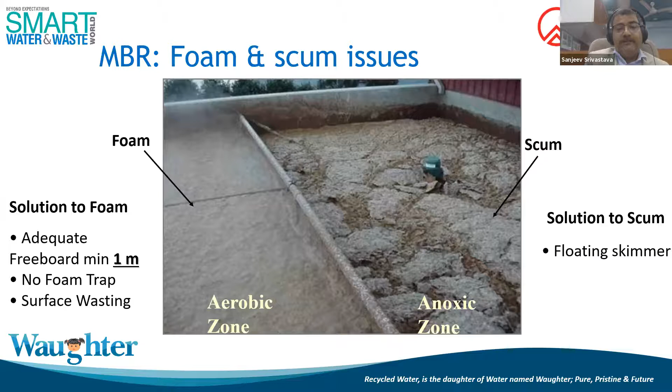The largest issue I see is MBR which is not properly automated. MBR should never be without automation - PLC, SCADA, interface - and therefore the relevance and importance of all these electrical equipments and instrumentation is often ignored. Believe me, if something has to work in a batch of 150 batches per day, and add 6-7 more different styles of CIP into it, it has to be 100% automated, operated from my desk right now here, a plant in Chennai - something like that kind of environment.

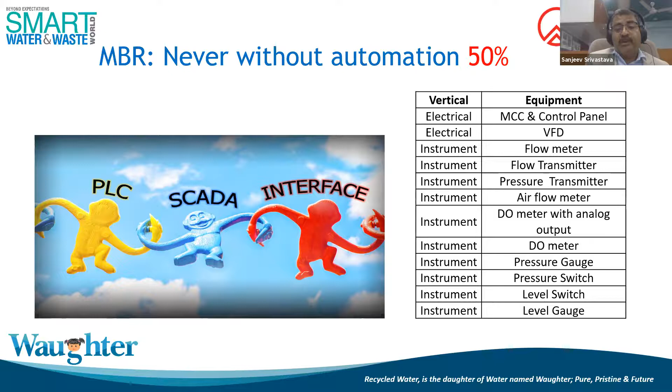If you start leaving it to the operator's intelligence to run an MBR, then it will be a problem. And Shirodkar, in my experience, most of the MBR plants I've seen, the major problem is not in the membrane, major problem is not in engineering design, major problem is cutting corners on the automation part or using poor quality components. Now we talk about some good things.

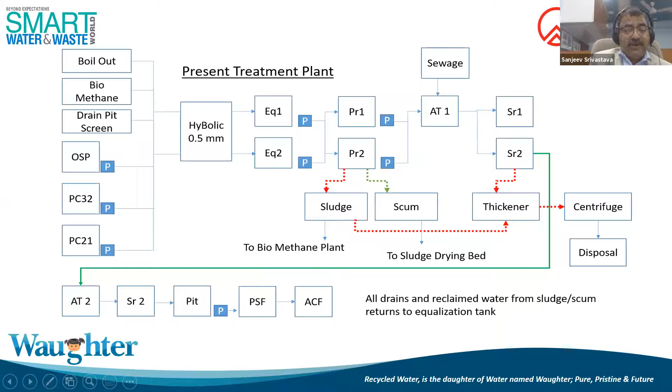Now when you look at the existing plant of this kind of operations, just to go by the unit names, you have a HyBolic screen which removes potato chips, parts and peels and those kinds of pulps. Go to equalization, pre-treatment, go towards the aeration tank, the sewage. Then you go towards the secondary clarifiers, thickeners, scum removal, and all those things. These are some existing plant details which they wanted to modify.

So it was modified with the DAF system. There was one more option, whether we can put a UASB, but they concluded to go for DAF. Once they went for DAF and finally went to Anoxic, AT, and MBR, pumping, product - beautiful. Some new units installed, and this plant is performing superb, that kind of quality I'm talking about with respect to the upgradation. So what is the success story on this kind of MBR? Very simple - highly automated plant, nothing else.

So if you make a plant highly automated, what is there in the potato chips? It's a beautiful product, there's no chemistry involved into it. Whatever the COD load is, it's highly biodegradable, so to speak.

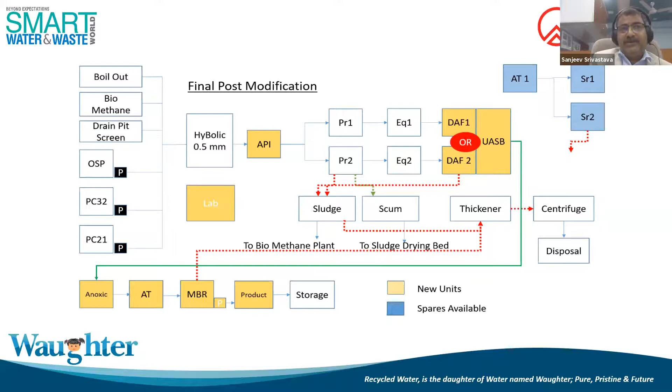Now let's talk about one or two bad case studies. The idea is not to blame anybody, just to share the experience.

31 meter cube, recirculation is 50 meter cube, back pulsing is 0 because there's no backwashing. The feed pump has to start at 25 meter cube per hour. So something close to 45 meter cube per hour is the fill rate of the MBR. That means in the MBR tank, water is coming in at this rate.

So level changes in the MBR tank, very common sense. And these level changes can create a problem. That means there could be overflow at the peak condition, which has to be avoided.

So the simple solution to avoid this, somebody followed. What was happening is level changes in MBR tanks were resulting in permeate extraction without full submersion, then nearly a 9-minute filtration. So whatever level has increased in the tank, that has been compensated. Fine. Now next 9 minutes, the filtration rate is more than the fill rate, correct?

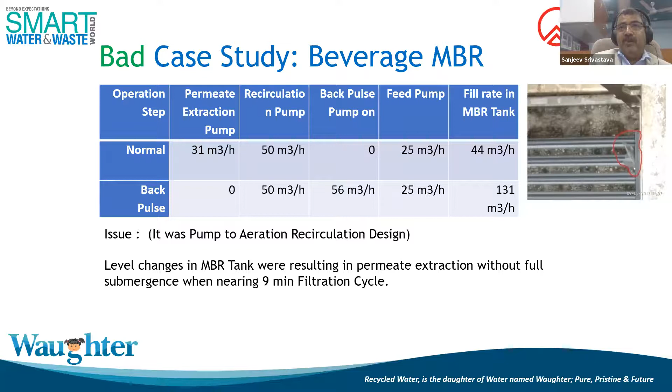And the poor operators were not able to really find out what the problem was, because they had never seen MBR working in that way. Maybe the commissioning engineer, when he was working, it was okay, but when he left the site, it was not okay. This kind of problem happens.

One more case study, of a health drink provider. Now what is the issue? It was the pump to aeration recirculation design again, and they reported clogging on the flat sheet membranes.

Now understand, if the flat sheet membranes are clogging, the reason is very simple: poor removal of rejected MLSS from the tank. Now what we are talking about is that we have to do a proper plug flow reactor design.

Simple, very simple thing. Why? Remember, a very important thing—a lot of time when MBR is taught, we talk about air scouring. This is a beautiful word. Everybody loves this air scouring.

Now remember, air helps you keep the surface clean by shear. That's it. Air cannot lift your particles and take them out of the MBR tank. But the responsibility to return MLSS back to the activated sludge is that of the designer. And a reactor design should be there in front view.

I get a warning of unstable connection. I hope it is improved. Okay, so if you see this view, 2 more minutes.

I'll just finish. So if you look at the front view, or LHS view, or top view, you must distribute whatever is coming up into the tank very nicely, and it should all rise up or rise down. That is up to your design, but it should look like more of a plug flow reactor.

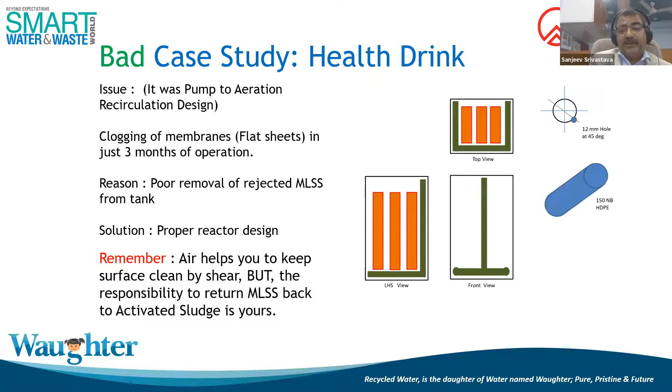Very simple: air will help you clean the surface, but air will not help you take the rejected MLSS from the membrane surface to the aeration tank. So this responsibility sometimes creates problems.

Shirodkar reminded me at the right time. It was my last slide.

We keep discussing issues - poor screens, priming issues, automated valve failure issues. Automated valves are required to work 150 times - open, close, open, close, open, close. So that quality cannot be made in my neighboring industry; the quality has to be somebody good. I won't say made in Germany because India also makes very good quality. But there has to be quality in the components which you CIP, not automated sometimes - otherwise you say, oh, CIP we'll do once, then we'll do it manually.

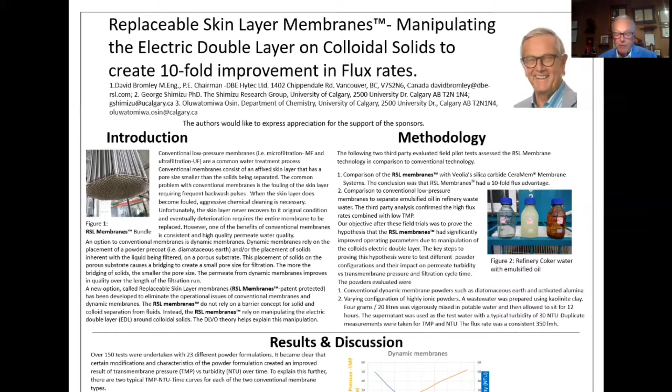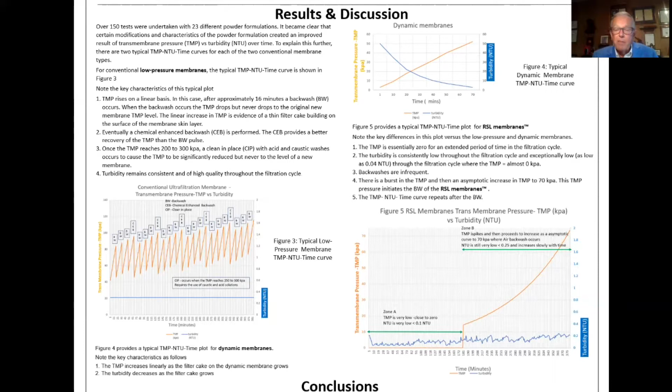So let's look at what we see as conclusions. The fact is that the RSL membranes operate for a significant portion of the filtration cycle with a transmembrane pressure close to 0 kPa.

And this can be explained by the manipulation of the electric double layer on the colloids. The DLVO theory teaches the impact of the ionic environment on the strength of the electric double layer. Because of the intense ionic environment caused by the RSL powder itself, the colloids are repulsed from the surface of the membrane. As a result, during the zone A timeframe, the membrane surface is not fouled, and the permeate can flow freely through the powder and the membrane tube. And remember, the RSL membranes have a very large pore size, so there's no hydraulic restrictions.

The RSL membranes operate in a dead end mode, and the repelled colloids concentrate in the membrane housing. Eventually, those colloids leak into the RSL powder, and the electric double layer around those colloids collapses. Van der Waals forces become dominant. The colloids then aggregate and attach to the RSL powder. The pressure then spikes and increases asymptotically. This is the zone which we call zone B timeframe.

RSL membranes are distinctly different from all other membranes. The ability to manage the electric double layer on colloids facilitates high flux rates at very low transmembrane pressures. Thank you, and I look forward to your questions.